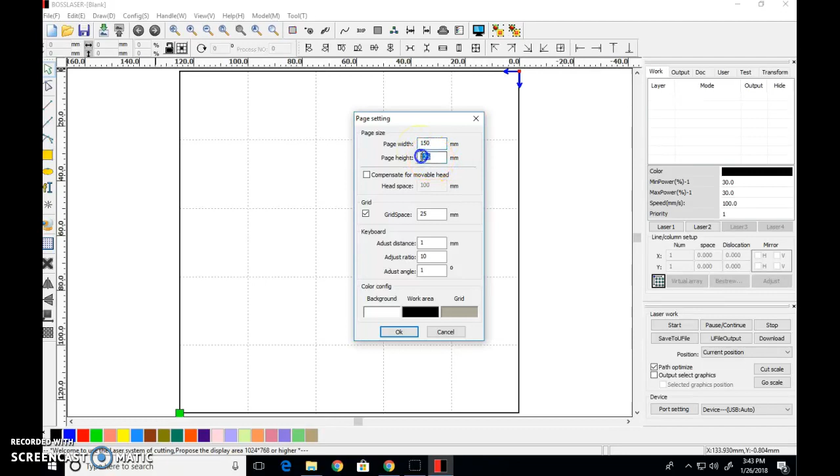The first thing we need to do is set our page size to the appropriate size for our work today, which is 150 millimeters wide by 150 millimeters tall. Follow my mouse up here, we're going to click on Config, then come down and click on Page Setting. I'm going to set page width and page height both to 150, and click OK. Now you can see I'm at 150 by 150.

Now this is a fairly straightforward exercise here. We're going to be importing a file, sizing it, and then shooting it off to the laser.

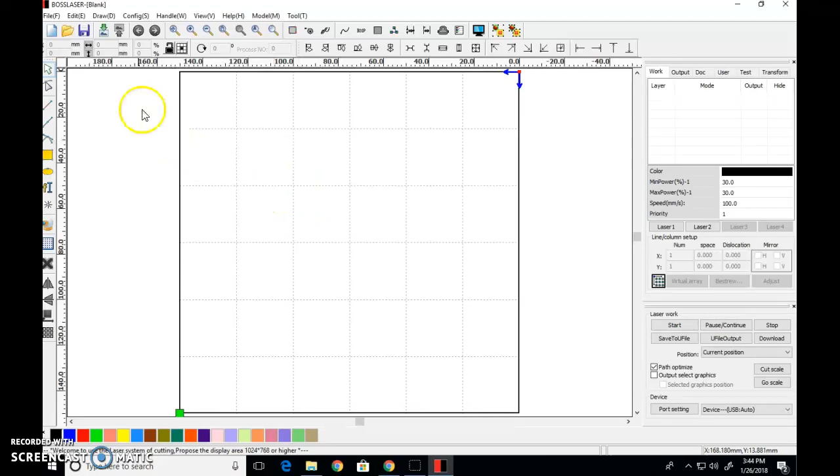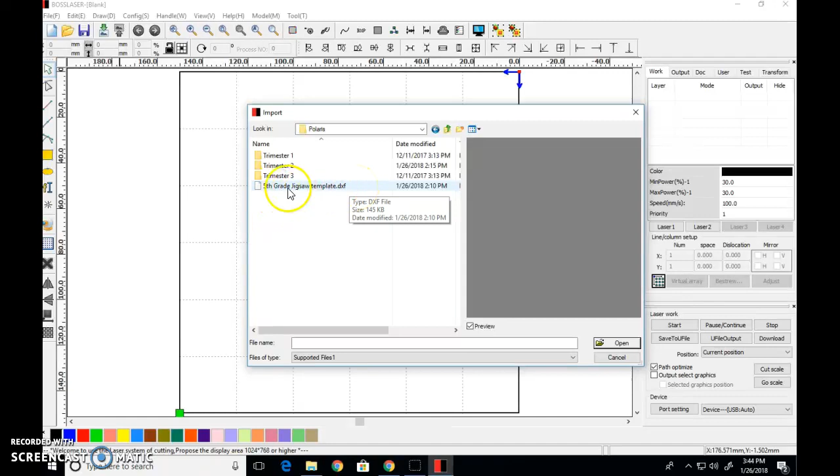First I'm going to come up here to the import button and click that. I'm going to use this drop-down menu to find my way to the CHMS TechEd file. You might end up being in any number of places, but always come up to this drop-down menu and get yourself to the CHMS TechEd file, then come back to home base. We are in 5th grade, so we're going to double-click that to open it. Then, depending on which team you're on, you're going to double-click that team, and you're going to see waiting for you the template we're going to use, called the 5th grade Jigsaw template. I'm going to click that, look at the preview over here, and click Open.

Now all of a sudden all I see is a jigsaw puzzle, but if you zoom out using your scrolling wheel, you'll notice my 150 by 150 millimeter square, and we want to fill that up with the jigsaw puzzle. Now before you go and grab onto a corner and start stretching things out, I need you to do one very important step: we need to group all of these objects together before we stretch them, just like in Tinkercad. If you stretch this out without grouping, we're going to cause some trouble.

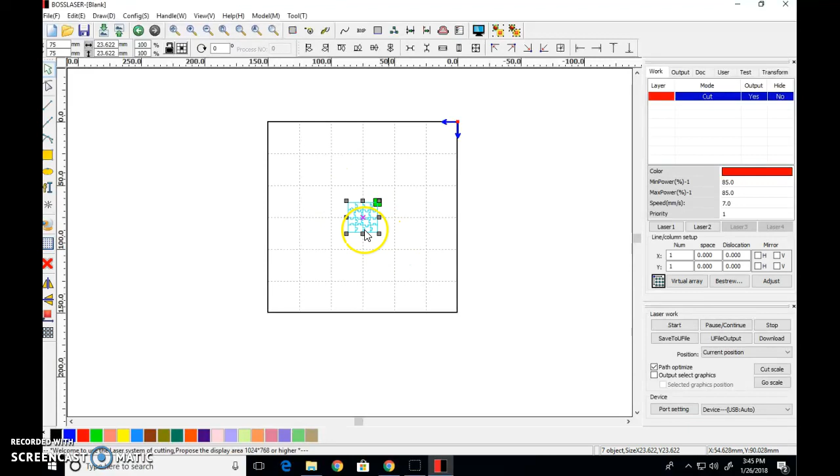So the first thing I'm going to do is click away so that this turns to red, draw a box around this whole thing to select it all. We're going to come up here and click the group button. Now I can use the corners to stretch this out. I'm going to stretch this one out into this corner here, leaving it a little shy of the corner — I'll fix that later. I'm going to stretch this one up to the upper corner here, again staying a little shy of that corner.

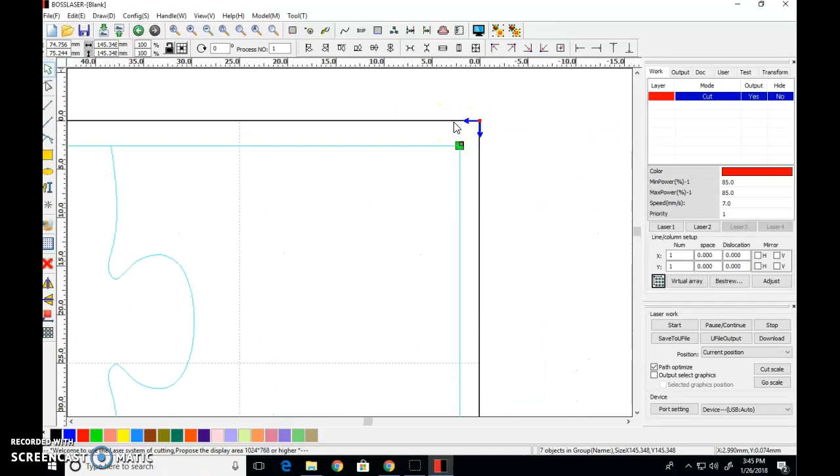Now I'm going to zoom in on that corner. Notice that this program zooms in to exactly where your mouse is pointing, so I'll point at a corner and zoom in. Now I'm going to fine tune this, dragging it right to the corner. I'll zoom out, come point at this other corner, zoom in, and drag this corner right to the corner. Beautiful.

Now I'm going to take a look at how this looks. I'm liking that — make sure all these corners are filled up.

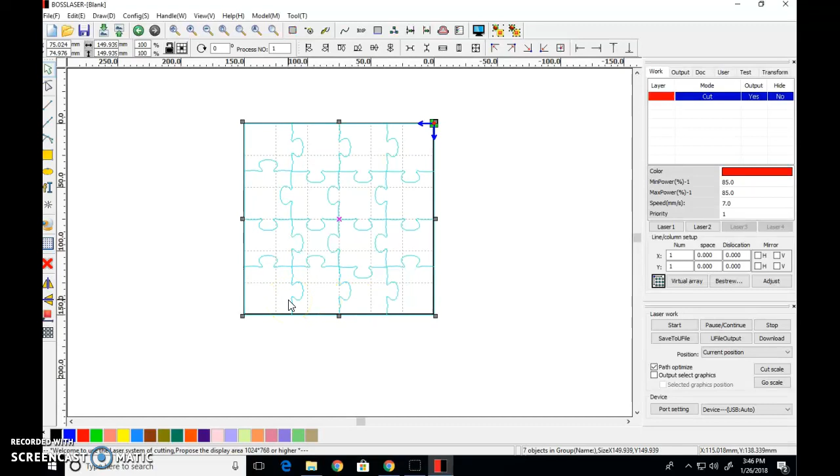Now I need to set the speed and power of the laser to do its work correctly. So follow me over here. You'll notice when you click away from your object, the whole thing turns red. Come over here to the output menu — the corresponding red color is called a cut line, which is good, that's what we want. You'll notice it's working at a power of 85 and a speed of 7. We need to change one thing about that, so go ahead and double click on the red bar right here.

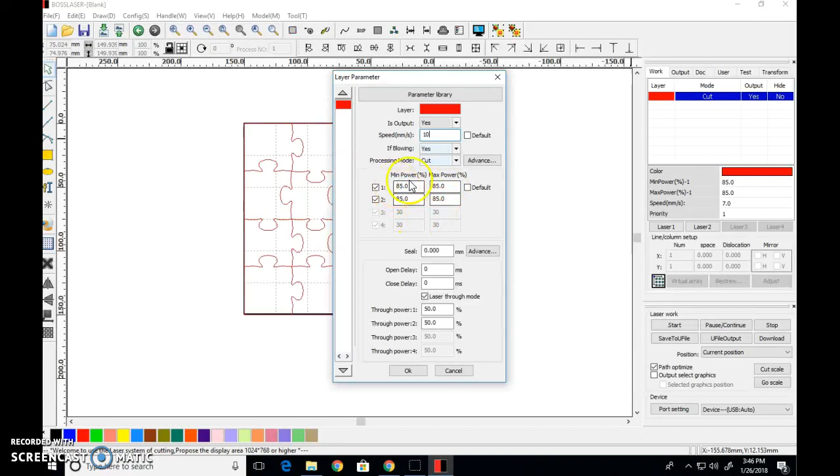85 is the power we want, so we don't need to change that. If you are in here and seeing a number that is not 85, change it to 85 — all 4 of these need to read 85. Except the speed, which needs to be 10. So speed of 10, power of 85 all around, click OK.

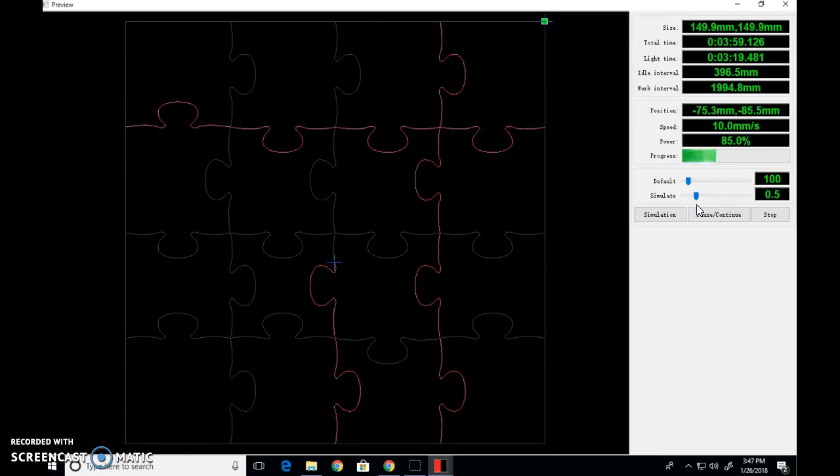When you're at this stage, if you're feeling pretty good about your work so far, you can click this little computer monitor up here, the preview button, to get a preview of our work. A word of caution: don't try to zoom in or out when you're looking at this page. But you can come over here and click simulation, and actually see the laser doing its work. This is obviously going much faster than it would — that might be more the speed the laser will actually work at, but you can see each and every one of your individual cuts. I'd recommend running the simulator to make sure the laser gets around every cut line you have before calling me over.

Okay, if you're satisfied with this, I'm going to run you through a saving procedure. Follow my mouse — we're going to come up to File, then down to Save As, and depending on which team you're in, I'll have you click your way to it. So if you want to start back at CHMS TechEd, double-click 5th. If you're in Polaris, double-click Polaris. We are trimester 2 — incidentally, if you're taking this class trimester 3, click that one instead. Obviously click the trimester you're in. So let's go back to trimester 2.

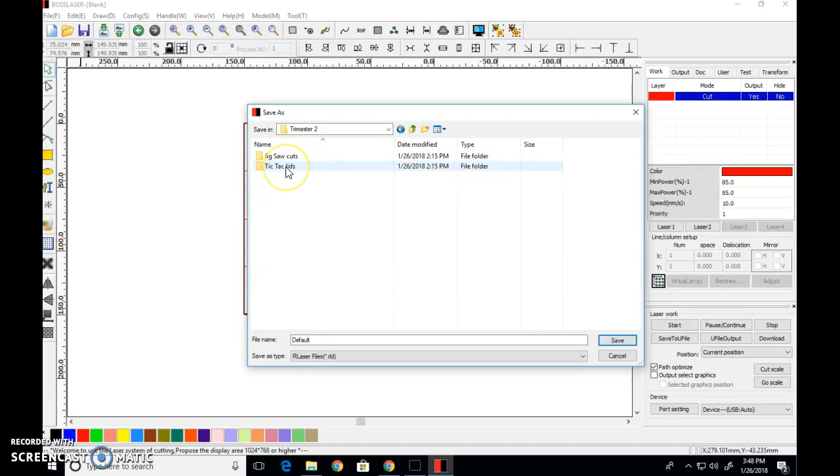And are we doing Tic Tac lids? No, we're doing jigsaw cuts, so we're going to place it right here. You're going to type your name — I'm going to type Mr. Keating, that's all I need to type, and press Save. Once you've done that, you should see your file name up at the top here. Once that is true, you are ready to have me come over, double check your file, and bring it to the laser.